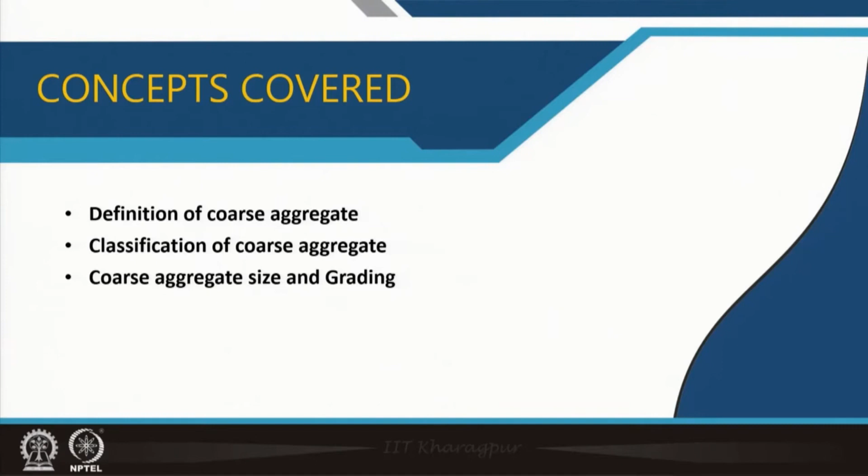So, we are in lecture 3 of module 4. Module 4 is on concrete, and in this lecture we will discuss coarse aggregate. The earlier two lectures explained what concrete is, and in the previous lecture we covered fine aggregates. Now we move to the next ingredient, coarse aggregate. In this lecture we will cover the definition of coarse aggregate, its classification, and coarse aggregate size and grading.

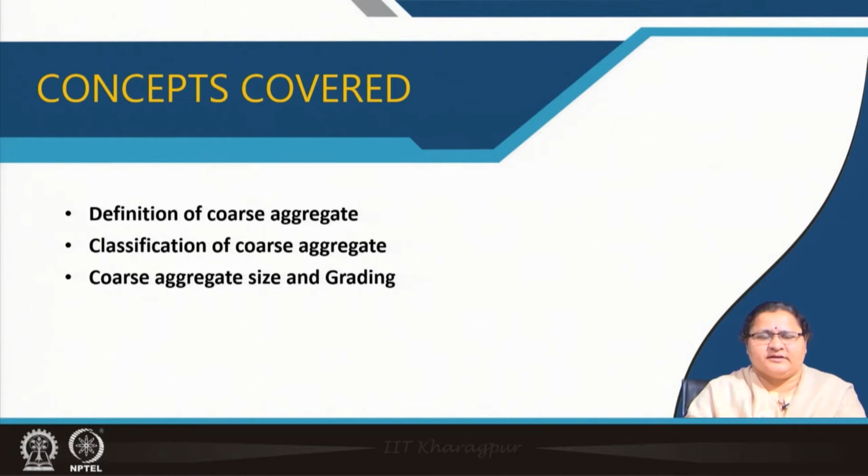Unlike fine aggregate, which is very fine particles, mostly sand predominantly used across India, here we deal with larger particles called coarse aggregates. We already discussed that particle sizes below 4.75 millimeter were considered fine aggregates, and in the calculation we had seen something around 0.15 millimeter sieve size. If something passes through that, we consider it clay, which is not good quality sand if present in high percentage, because it does not allow proper mixing or binding with the coarse aggregate.

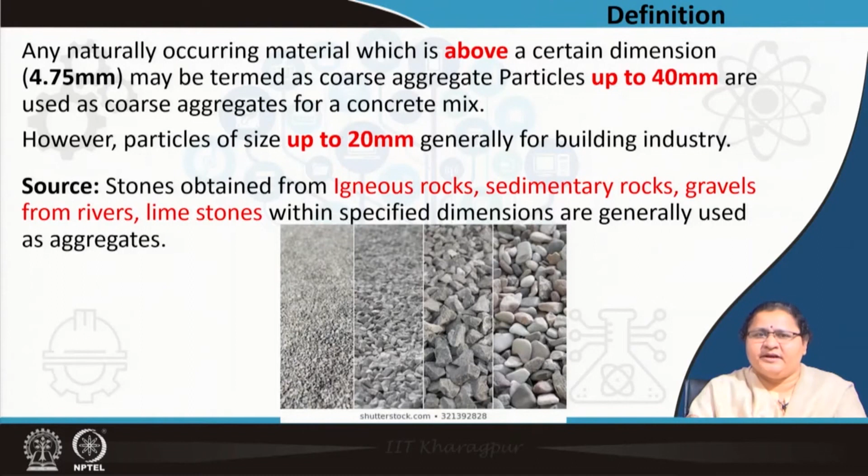So what are the sources? Unlike sand, which is mostly from rivers, here you see stones obtained from igneous rocks, sedimentary rocks, and gravels obtained from rivers, limestones with specified dimensions as already told, mostly clubbed under coarse aggregates. Why igneous rocks, sedimentary rocks, gravels? Because ultimately these impart strength to the concrete. Instead of bringing a rock with a definite shape, here you are binding rocks of lesser dimension together to form something like a rock.

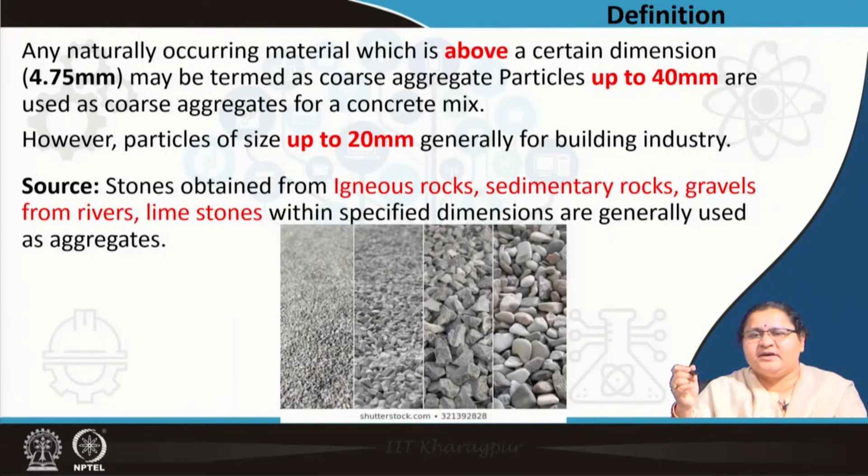So what is concrete? It is a man-made mass which you cannot break, bound together by these particles. If you see proportion wise, the aggregates in the mix have the maximum share, the largest share. If you remember, 1:1:2, 1:1.5:3, 1:2:4 - the largest share is the coarse aggregate, and that is the strength provider of the entire concrete. So the strength of the mix comes mostly from this aggregate, but remember the binding is also very crucial, how it is being bound. We will come to that also.

So coarse aggregates are basically inert fillers and an essential component of concrete. Porosity, thermal expansion, shrinkage - these key points should be minimum, because it has the maximum share in the mix. Any kind of expansion, shrinkage, or allowance of moisture inside will lead to cracks. So it has to be kept in mind which material is better in this regard, such as igneous rocks, basalts, or sedimentary rocks, and these are responsible for strength, durability, workability as well as economy of the entire mix.

If we talk of density, it should be less than around 1500 kg per cubic meter. This also gives a clue of the density of concrete. A good concrete mix is said to have around 60 to 75% of its volume from coarse aggregates, and by weight, 70 to 85% is coming from the coarse aggregate. So now you can understand from these figures the role of this coarse aggregate. It is the component which is bound very precisely, and the preciseness in binding gives better strength to it.

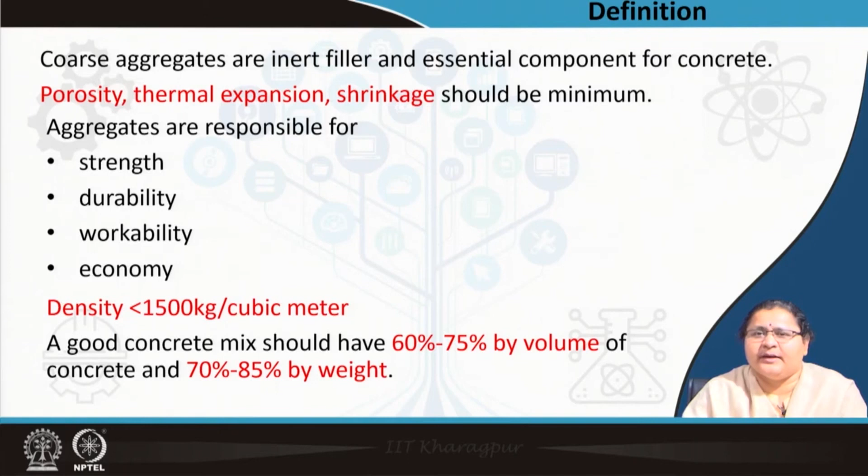So who binds it? It is the cement, sand, and water together that binds it. We will come to that in our next lecture later. Now, apart from these stones, we have some other sources too - vermiculites and perlites, which are obtained from volcanic glass, and are quite light in weight, with a figure less than 1100 kg per cubic meter. So they give you lightweight concrete, and these items are compressible, insulators, fireproof, non-combustible, and non-reactive too. So you needed inert materials, and these are chosen when we need lightweight concrete.

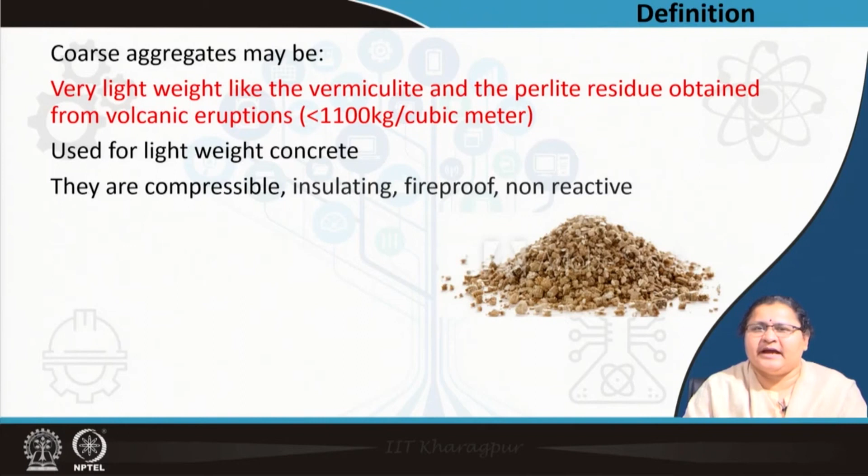Sometimes there is non-availability of stone. In our country's context, say in Tripura, etc., you may not get a lot of abundance of stone there. So can you not get coarse aggregate, is it so? Or you have to transport it from another location, which will increase the cost, and then the economy will not be achieved.

There also you can use this lightweight broken brick aggregate as a coarse aggregate in the mix. These are also used for road constructions. 4th grade brick bats are also used for constructions, so these can also be used as coarse aggregates in a concrete mix.

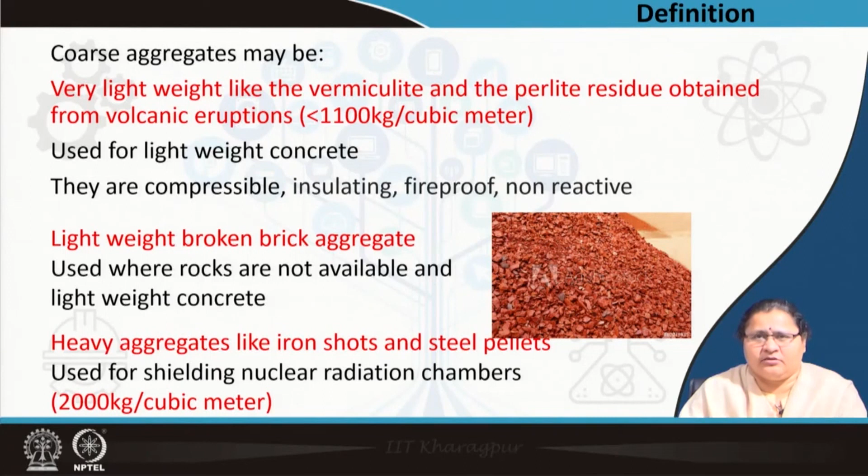Similar to the lightweight varieties, we have another end which is the higher side. Those are heavy aggregates, usually iron shots, steel pellets, and they are used for shielding nuclear radiations. So wherever there is a nuclear reactor being constructed, you may use such kind of aggregates, and the density is going higher, around 2000 kg per cubic meter.

So not only stone, but we have so many other things to be used as coarse aggregates. One point I would add is recycled coarse aggregate. You may have a construction being dismantled, aging and broken down. Even the concrete from there, you can use - take out the coarse aggregate, move away the sand and cement mix from top of it by washing, and then reuse it. So that is a kind of waste consumption, and these are also being experimented and used in this field.

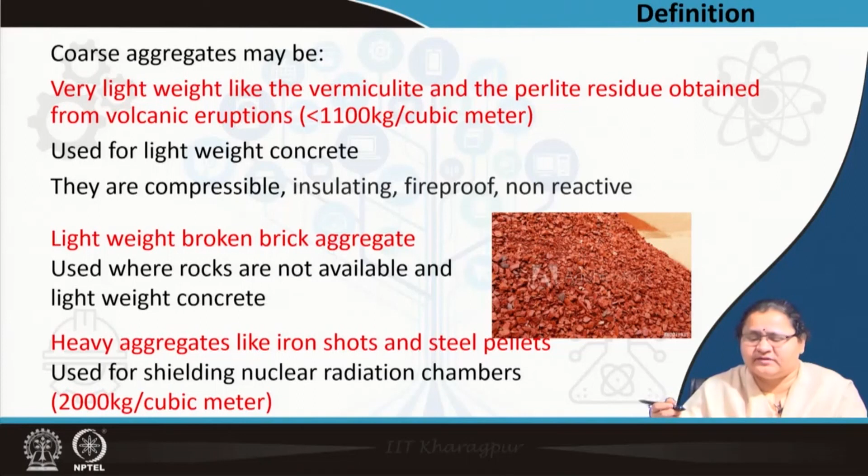Now, coming to the very important and critical aspect - the shape. If we classify the shapes, we will see they are rounded, irregular, and angular - maybe both are almost similar - and the last one is the flaky one.

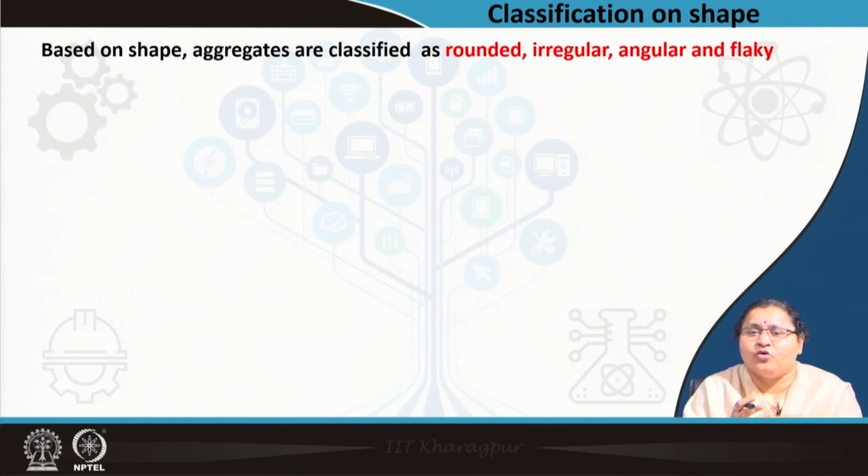Rounded aggregates have least surface area, produce minimum voids in concrete, but cause bond failure due to poor interlocking property, and the minimum surface area means surface contact is also minimal.

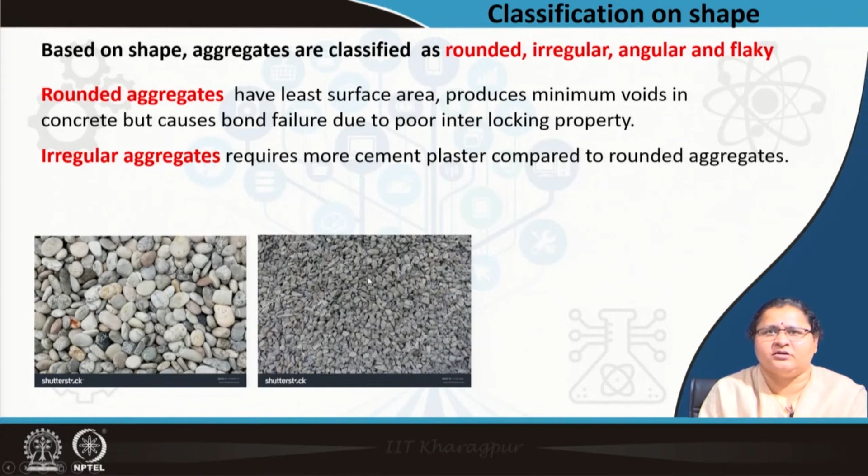Let us look into the other type - irregular aggregates. This is what you mostly witness at any construction site. From now on, keep your eyes open to see these kind of things. You will never get the first variety on site, but this second variety you must have seen. What do you see here? They are not circles, they have lots of faces, and they can hold the binder on each face, have a more closer or compact structure, and contribute to the binding process, which will eventually give the strength.

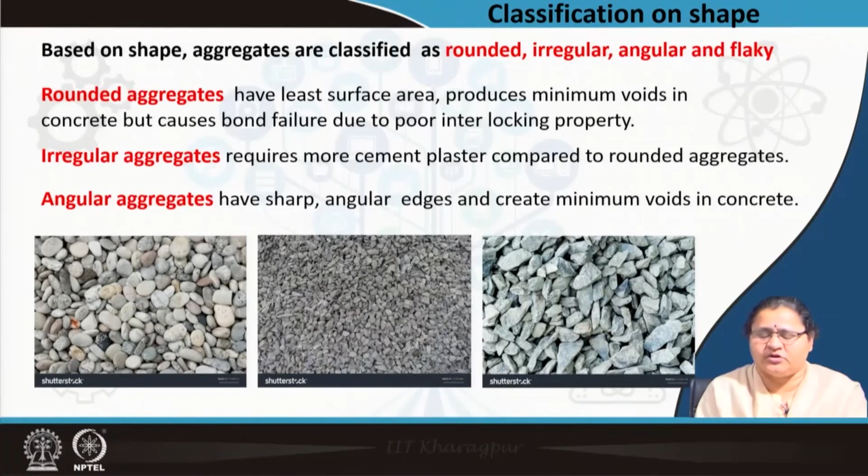Angular aggregates may have sharp edges also, as you can differentiate between the two pictures. They create minimum voids in concrete also. So if you go for this, some amount, because you cannot get everything 100% irregular, 100% angular. So you can have these two for your regular use.

Next is the flaky aggregates. Flaky aggregates means they are thin and long - elongated aggregates where length is almost twice that of its mean dimension, and the thickness is quite low, about 0.6 times its mean dimension. That means it is almost 3 times long compared to its minimum width, and these are identified as flaky aggregates.

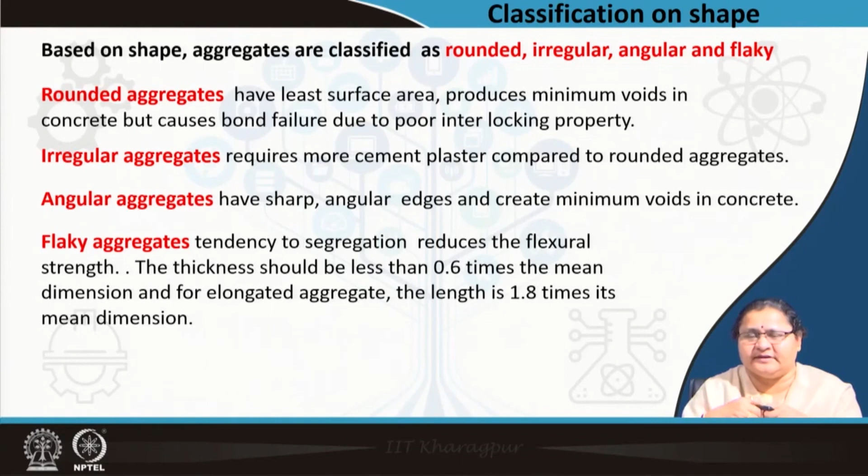They reduce the flexural strength and they also tend to segregate. We discussed the process of segregation earlier with the compaction process - if you keep compacting for a prolonged time, your coarse aggregate will segregate from the entire mix. So if you have flaky aggregates, it will come out easily, enhancing the process of segregation, which is not at all desired.

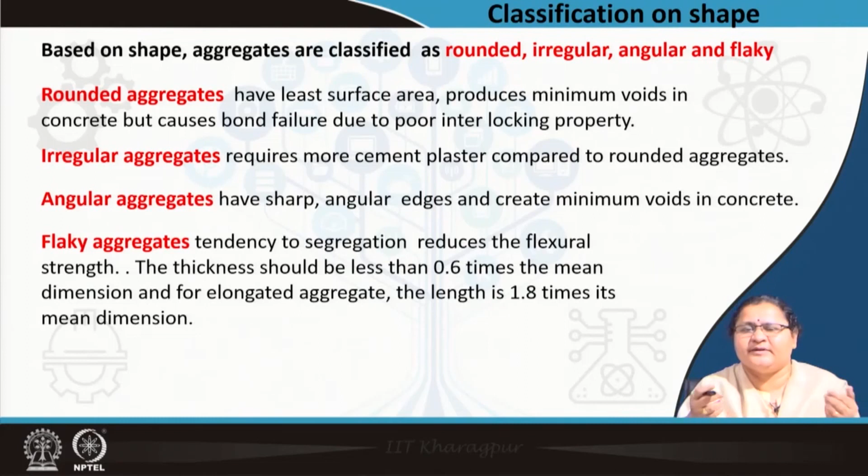Keeping this in mind, you will look for irregular angular aggregates. There is the flakiness index and the elongation index - I am not going into further details, but you can measure it. There are appropriate tools to measure the elongation index, to look into the sphericity, the roundedness, the flakiness index. But yes, human eyes are always there to take it out. In an entire heap of aggregate you receive, a few such particles can always be there - some 1% can always be there. Some hand sorting can be done, but an entire lot cannot be used which is flaky in nature.

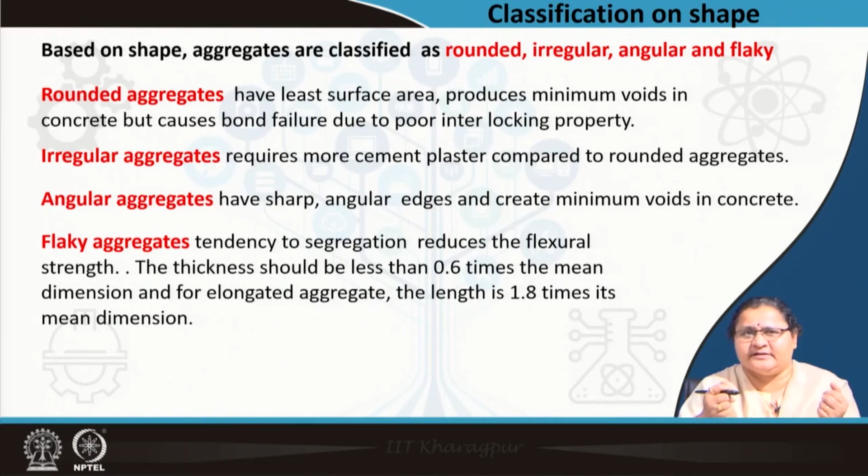Now coming to another interesting thing - particle size. These aggregates have to move through the reinforcement if it is reinforced cement concrete. The gap between the reinforcement will allow these particles to move from one end to the other, because no human intervention can cross these particles one by one. So sizes should be appropriate to the gaps present between the dense reinforcements. If it is dense, you have to go for smaller sizes; if it is a huge mass construction, you can go for larger particle sizes. Usually mass construction uses 40 millimeter particle size. We have 80 millimeter, even 150 millimeter particle size, but those are not much of our interest - we have beams, columns, slabs as reinforced concrete structures where these particles have to pass.

Another important point is the clear cover. What is clear cover? Whenever you are having, say, a beam to be supported, this is a slab, so you will have different reinforcement layers.

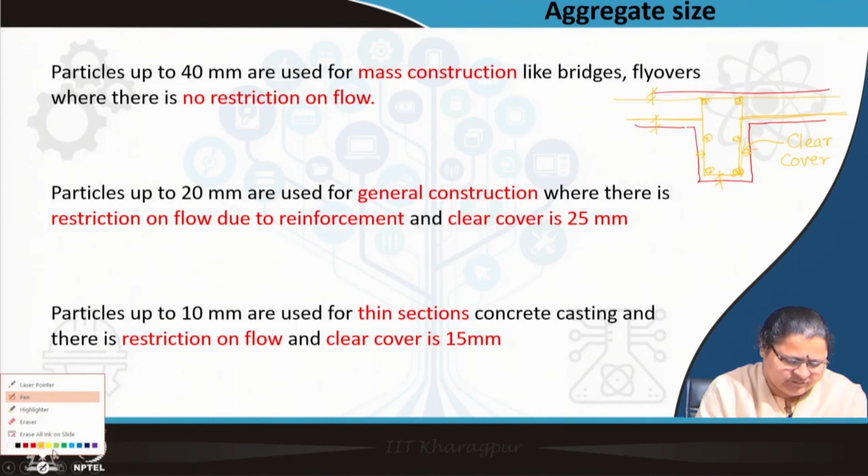So where will my aggregates go? If we take another color, we will have our aggregates sitting in these gaps. So if this is 25 millimeter, then your aggregate size won't be more than that. So that gives the aggregate sizes for general construction. The particles up to 20 millimeter are allowed, so you will see that mostly these aggregates are 20 millimeter and below.

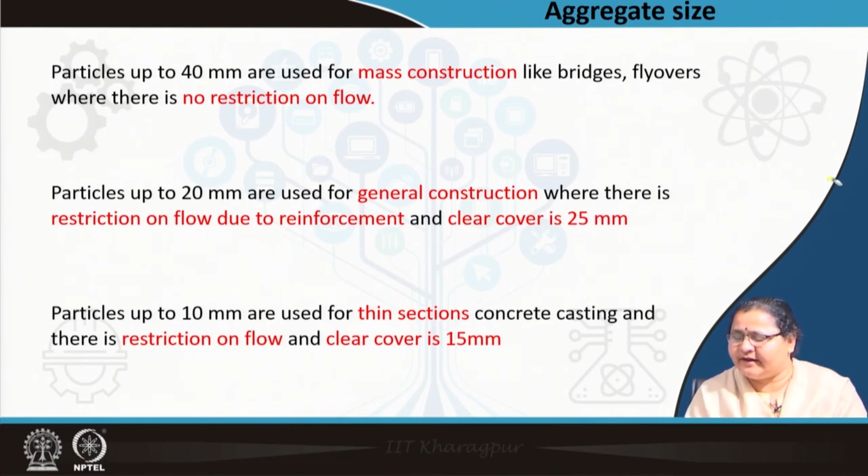Hope it is clear to you the concept of clear cover and the size of aggregate and reinforcement size. Particles up to 10 millimeter are also aggregates, coarse aggregates. Where will they be used? Thin sections, thin castings, very thin shells, not so heavy beams. So there is a restriction of flow. The clear cover is 15 millimeter. Such kind of structures will have low particle sizes. In ferrocement, where it has to move through mesh, chicken wire mesh, you will have to go for very smaller size chips, stone chips. So hope you understood the significance of aggregate size.

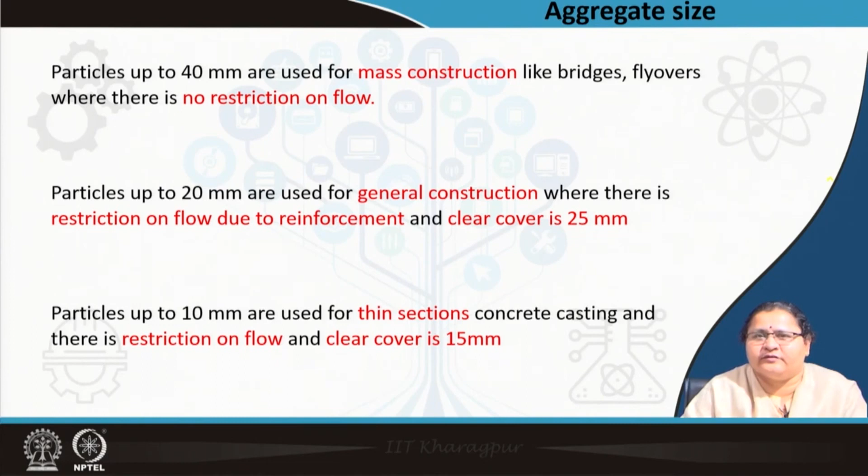Now we move to another interesting part which is very similar to that of fine aggregate, that is the fineness modulus. How do we find the fineness modulus of aggregate? Because it is not humanly possible to individually measure each of the particles, even though they are larger than that of sand, and neither it is as fine as sand, but the principle remains the same.

You have a larger size mesh sieve through which you have to pass the aggregate which you have considered. First of all, through understanding, you have to reject the elongated flaky stone chips by maybe hand picking, but more or less you will get a regular size which have to pass through the sieves, and then you have the specific sieve sizes, and you are allowed to stay up to 4.75.

So let us see the maximum size based on fineness modulus. If it is 20 millimeter and below, you will get a fineness modulus of 6 to 6.9. If it is 40 millimeter and below, it will vary between 6.9 to 7.5, and if it is 75 millimeter and below, it will be higher, and again if you put further larger sizes, this value will be more.

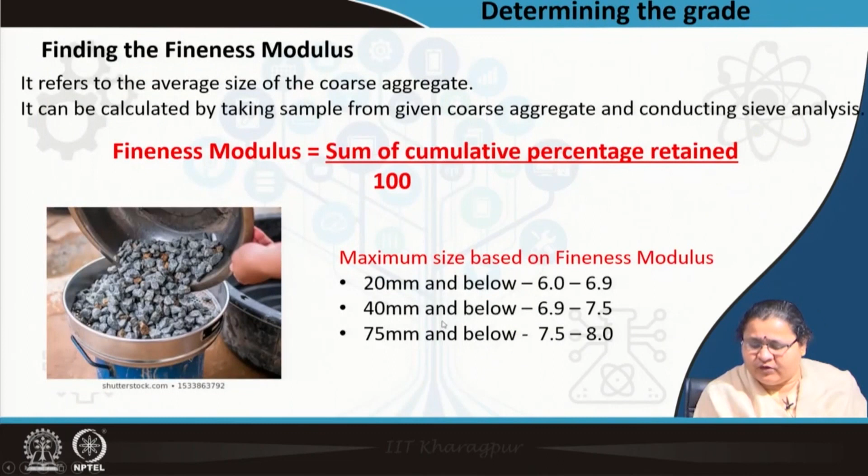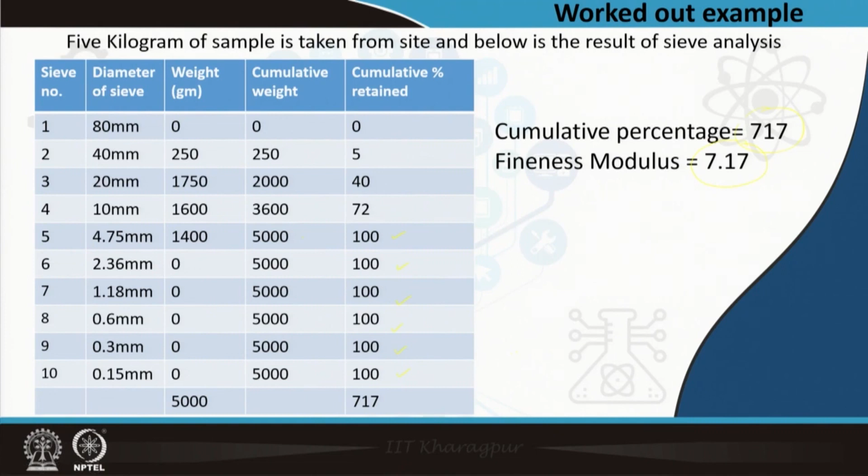As because there is some 40 millimeter granule in this, the entire bunch has been qualified as 40 millimeter and below. It has come under 40 millimeter and below. So we should always remember these are giving you the indication of what will be the actual fineness modulus.

So let us conclude, telling that stones are mostly used as coarse aggregates. We also know a few more things which are used, of which brick is mostly used other than stone. Aggregate shape is important, aggregate type is also important as it gives the strength. Fineness modulus can be similarly worked out like that of sand, but here the values are more, because the last few trays are not holding any item, and it is having a value more than the fineness modulus of sand. Irregular or angular shapes have better bonding than rounded or elongish shapes.

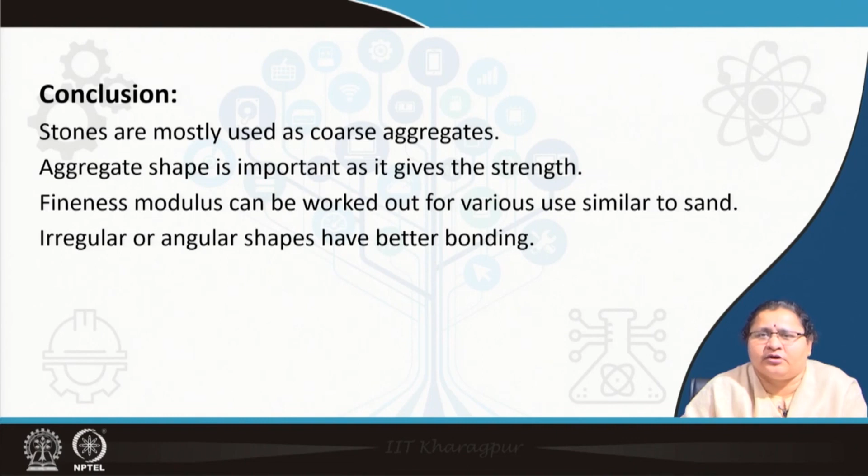So with this I would close this lecture, and in our next lecture we will move to cement, water, and furthermore to know more of concrete. Thank you.